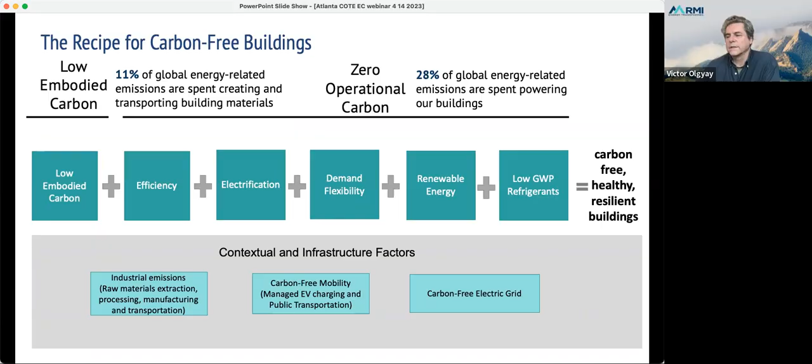At the bottom of this slide, contextual factors. We also have to think about industrial issues, transportation and mobility, as well as the grid. Those things surround our buildings and are things for us to connect to and integrate in the most benign and optimal way. So this is the way we think about it. And today, what we're really going to talk about is this piece up front, the low embodied carbon materials.

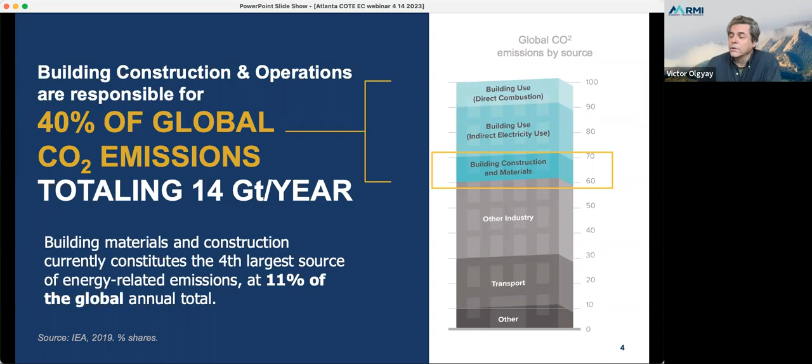As you may know, buildings have about 40% of global emissions. It's a huge piece of that. And construction materials are somewhere between 9 and 11%, depending on how you count it. But it's a big chunk of the overall buildings' impact, and one which we have a lot of control over. So what is embodied carbon? It's really the whole chain of how materials are used, from the very beginning, extraction and manufacturing of materials, to the end of life, where we have disposal and recycling.

So in this slide, all of those items in yellow are considered parts of the life cycle where we're thinking about the embodied carbon, and the blue is the operational area where we're actually using the building and expending energy to keep it warm or cool or ventilated or lit.

But moving along with this, most of the time people really focus on this upfront part, so the part on the left-hand side of the blue square, and that's really where a lot of this goes. And we don't usually have as much influence over what happens at the end of the life of the building, so we can make assumptions about that.

But it really ends up being pretty critical to think about that and to ensure that when we're designing buildings, we are taking that into account, that we should be thinking about what's going to happen in the future. So we're creating the opportunity for disposing or reusing our buildings in a manner that's going to have the best impact.

Yeah, so actually that upfront piece, the extraction and manufacturing, kind of the cradle to gate area, is really where a lot of the accounting for embodied carbon typically goes, and that's not bad. Clearly, the right-hand side is important as well, but the left-hand side is kind of the part where we can focus on today.

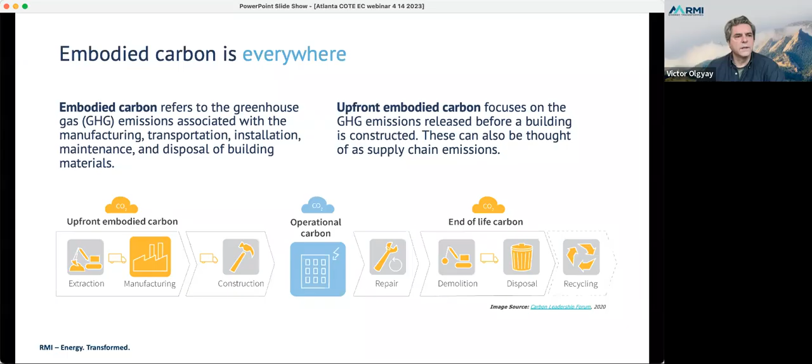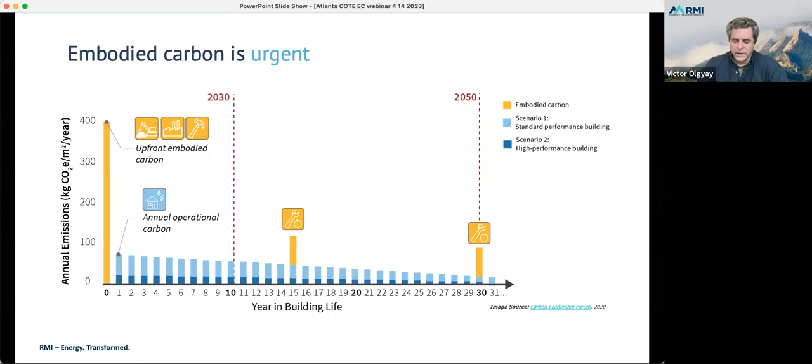The other thing about embodied carbon is it all happens right away, right? So these yellow bars here are indicating embodied carbon, the middle one being kind of repair or renovation that might happen to the building. But all of that stuff adds up, and the blue bars are indicating operational energy. But what this means is that this is a big hit of carbon to our climate right up front.

And over the course of 30 years or so, that embodied carbon will be sort of met by the operational carbon. And obviously, if it's a more efficient building, it might take a little longer, but the embodied carbon is huge. It's considered equivalent over, say, a 30-year lifetime. And it's worth thinking about, how can we start to address this?

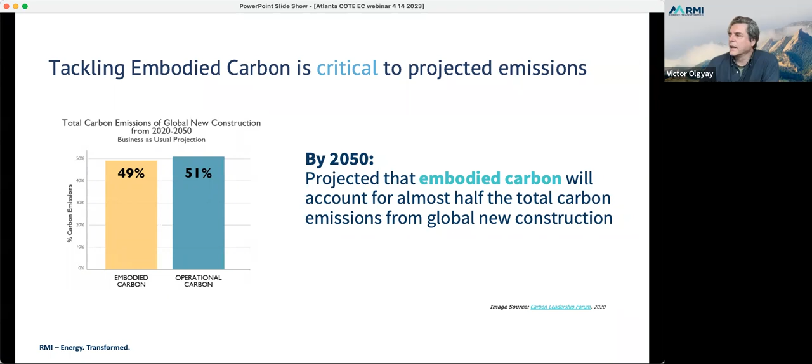So I guess maybe the good news here is that because people have not been thinking about embodied carbon too much, there's really a lot of fairly straightforward ways of addressing this that we can get on right away. So how do we do this cost effectively? Well, this was a question that we had at RMI, and a few years ago we worked with Skanska, and we produced a few reports.

There's this solutions guide for concrete, obviously being one of the big concerns, and then we looked at overall building construction and how can we start to think about reducing embodied carbon, and what makes sense, what's cost effective or at cost parity.

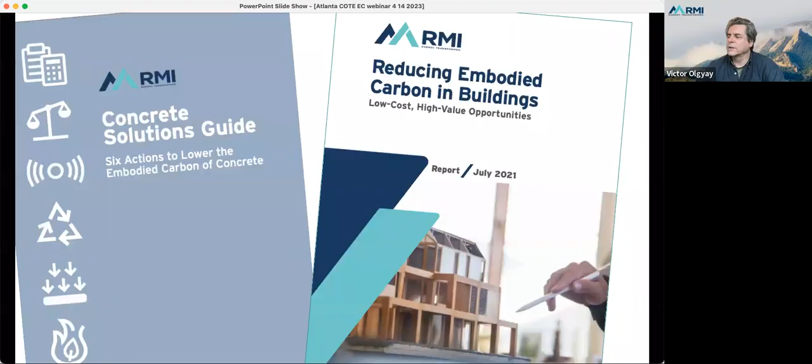So we looked at 3 different building types, and these were real buildings, actual physical buildings constructed by Skanska. And we looked through all of their different materials lists, and we took three typologies that we thought were representative of a lot of buildings out there. They're all slightly different. We've got the larger steel reinforced concrete building, a wood frame building, and a tilt-up building, which is more representative of warehouses.

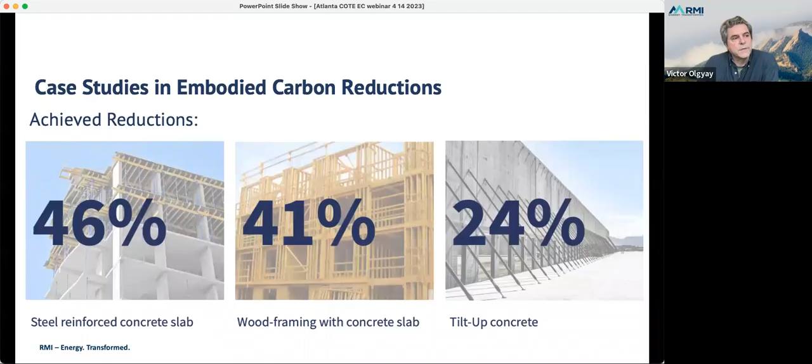And with all these building types, we were able to look at basically material substitution. So just one-for-one material substitutions, going from what was actually spec'd in the buildings that got built to something that was best of class or available for that building, but at cost parity.

So, in this case, with the mid-rise concrete and steel construction, if we found another kind of concrete that was lower embodied carbon and was essentially the same price, we just plugged that into our EC3 calculator, and we looked at all of these different areas, and we were able to come up with something in the range of a 45% reduction in carbon. And this is just, again, cradle to gate, A1 to A3.

And saving in the range of 2,000 tons of CO2e. And you can see in this case, it's a concrete building, so concrete ends up being the lion's share of the savings, but there's still quite a bit of savings in steel and glazing and other things along the way.

So it's one of those games we play where sometimes you can have a little bit of savings in a lot of materials and get to a good reduction. And sometimes it really just makes sense to focus on the big issues. So that was this first one.

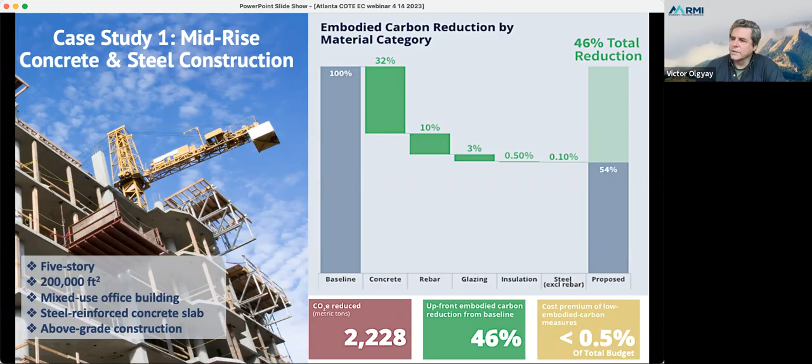Fantastic. And again, essentially no impact on the budget. Half of 1% is really in the noise, if you've ever done some costing for a building.

So this kind of made the point that we're trying to make, which is that there are a lot of significant embodied carbon reductions that are available to a typical project, essentially simply by asking and specifying them. This is not a big deal. It hasn't really been thought about that much to date, and so people haven't really focused on it.

And us as professionals in the construction industry can just say, hey, let's ask about this. Let's check the environmental product declarations, and hey, we can actually have a big impact fairly easily. Now, obviously, it varies a lot from location to location, but if you don't look, you won't find it.

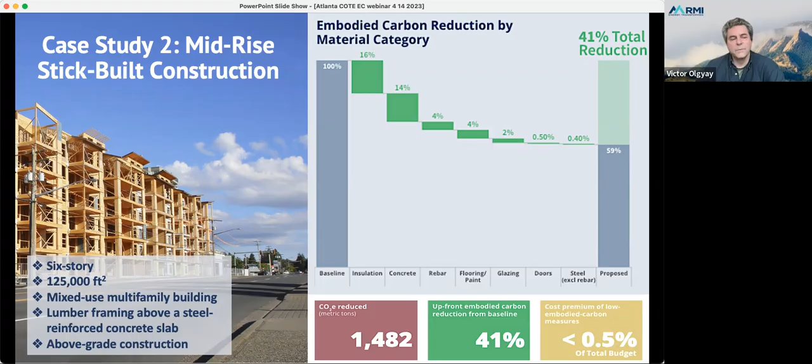So how do we think about that in terms of the measurement or the amount of embodied carbon in a building? There's two pathways here, and they're both useful for different aspects. The one way is to think about it on a material by material basis, and it's usually thought about from the environmental product declarations, or EPDs.

And then the second way to think about it is from a whole building basis, right? So this awful acronym of WBLCA, whole building life cycle assessment, which allows us to do trade-offs between different materials. So these are two different ways that have different attributes, and both actually very useful for different reasons.

But the EPDs are becoming quite standardized. I think they're becoming increasingly competent and able to be used with a fair degree of confidence and validity and comparability. So it's kind of cool that we have some good rigor on those.

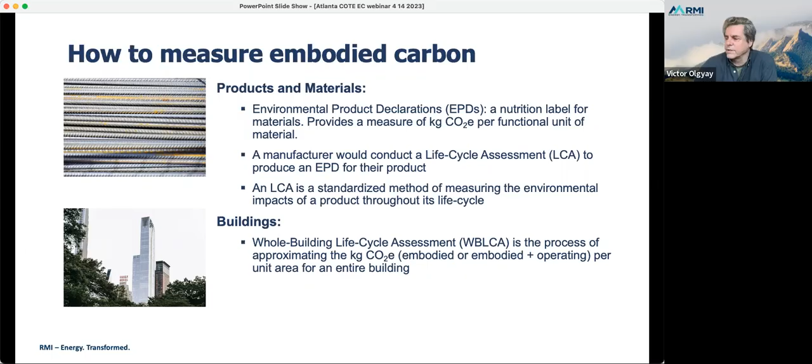With the whole building life cycle assessment, I'm going to say that it is evolving. It's still sometimes a bit more complicated. There are different baselines that people use. So the results do vary more than they do with the EPDs, which are, like I said, a little bit more carefully curated in terms of their accuracy. Okay, those are the two big ways of doing it.

EPDs in general, it's like I talked about with the little Skanska study. You can do a material by material switch out. You can basically take two kinds of flooring, two kinds of wallboard, two kinds of glazing or whatever it is, and look at them and say, okay, this one's going to have a lower environmental impact. It's pretty straightforward.

The whole building approach allows you to really switch out whole materials, right? So you can start to think about what would be the impact of steel to wood, or what have you. And that's not really something that you can do with an environmental product declaration. So this is a really significant way of thinking about this differently.

And this actually has a subtext, which is that to get really deep embodied carbon savings, you end up needing to do the whole building LCA. And that's where it's, like I said, a little bit more nascent in terms of the development of these tools and baselines and such. But in the end, when we're thinking about policy and so forth, we imagine that this is going to get a lot easier in the next few years.

And as it becomes more integrated into policy, we will see those deeper savings that are really only available by thinking about it in a holistic way rather than material by material. But right now, it's really easy to do material by material, and there's no reason why you shouldn't. It's something you can do today.

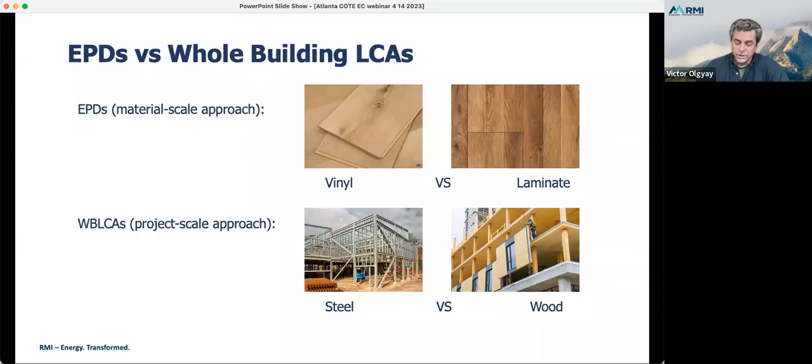So let's talk a little bit about strategies. My friend Larry Strain, I wish I had a better photograph of him, but he's a very nice guy, put together these 10 points, and this is available on the AIA website as well. He got a fair amount of traction with this little article that he wrote.

It points to some fairly obvious things. It's not the last word here, but it shows that there are fairly straightforward ideas that we can do and we should do. So reusing buildings, dealing with concrete, limiting these carbon intensive materials, using EPDs to choose lower carbon intensive materials in different areas. Think about carbon sequestration in materials, and we'll talk more about that.

Used materials, reused materials, high recycled content. Thinking about structural issues: how can we be more efficient in our use of materials through clever structural ideas, and just minimizing the amount of materials that are in there? So these are all kind of self-evident, but they do add up to significant pieces here.

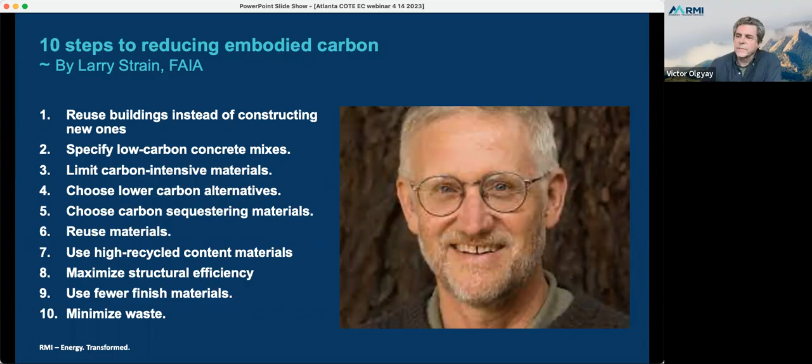And I guess as architects, designers and engineers, I'm going to say that this is something you should not be afraid of. This is actually something that is straight in your wheelhouse, right? These are not scary. This is actually your opportunity to show how clever you are and to think about design, right? Think about how this can be actually part of your palette, moving through the process of optimizing and building and being really excited about design issues. It can be just specification, but it can be so much more.

So an example of this is your local hero down there in Atlanta, the Kendeda building, a really beautiful building. I think it's a very pleasant interior, a lot of timber, and also I think the material is used quite efficiently, right? So we've got a nice combination of steel and wood to identify ways that you can strategically think about tension as opposed to compression and things like that. Overall, it's done quite effectively and efficiently.

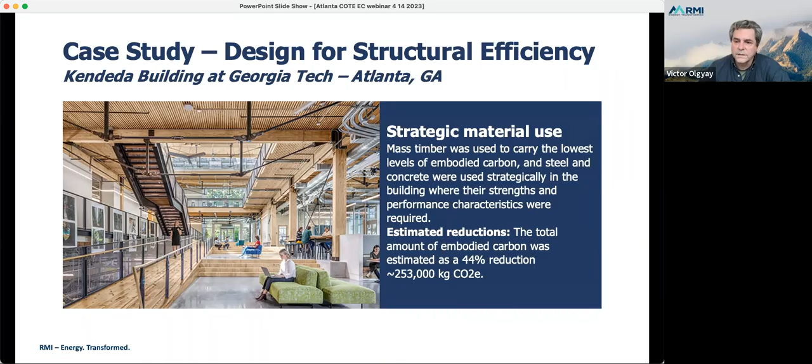And it has over 40% reduction in CO2. So that's impressive. This is a good building to be proud of. And it's beautiful. And I think in this case, you can see how low embodied carbon as a design influence assisted with the integrity of this project. So good work, LAS and company.

So thinking about this design aspect, there are things that are going to happen right up front, and then there are things that are going to happen at the end of the process. Right up front, we can start to think about this in a more holistic approach. Are there opportunities for using existing buildings? What are those larger design ideas that you can do in terms of location and concept, all of those things that can actually have the biggest impact in terms of CO2 reductions?

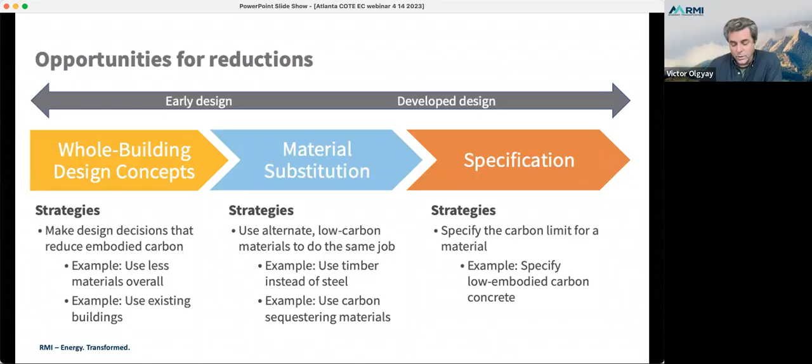And then on the other side, we have what we did actually with that Skanska project. It still got incredibly high amounts of CO2 reduction, but it was really just by substituting material for material. So there's a continuum of ability to have influence, wherever you are in the design process, to have those impacts.

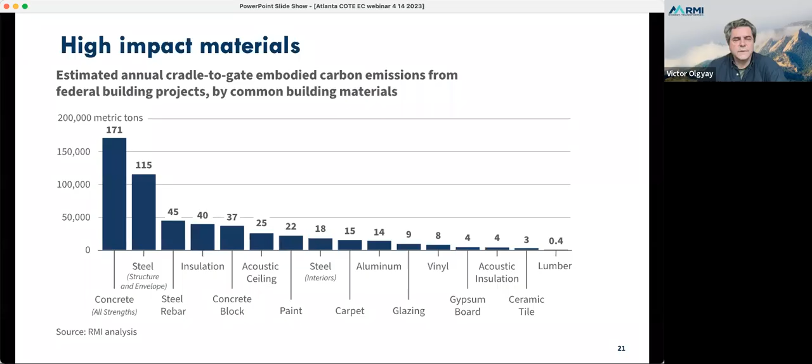So we do need to be concerned about all of these other smaller bars, but really it's that upfront material, like concrete and steel, that if you don't recognize right off the bat, you're missing a big opportunity. This is from a federal building analysis, so that's just a little caveat. Again, as always, your results may vary.

So concrete, a couple of ways that you can start to think about it. Performance specs are really good. And this is to some degree empowering your engineers about how to do this. And there is the SE 2050, Structural Engineers 2050, that are actually coming up with ways of thinking about this that are really useful for design. So thinking about it in a performance-oriented way rather than necessarily just a prescriptive one.

Thinking about SCMs. Now, these are a wide variety. People have traditionally used fly ash. That was something in LEED, but there's also slag from steel making. There are rice husks. Now, people are starting to use other pozzolans like ground glass. There are all kinds of SCMs out there. Oftentimes, they can actually improve the performance of your material. Not always, every project has different criteria, but think about SCMs.

Monitor how the project is actually going forward. Using sensors to see how concrete is setting up can make a huge difference in terms of time, money, and materials.

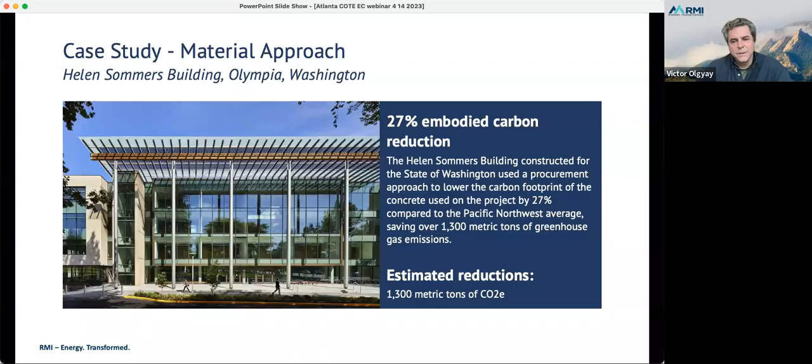Steel, obviously, another important product. There's a lot to say about this. Steel is changing a lot at this time. Sometimes it's opportunistic to basically just be using high recycled content. There's a big difference between the kinds of ways steel is manufactured. And I think we're going to see a lot more development of green steel as we're going forward here. Really, really interesting area. And I think for us right now, it's mostly about recycled content here in the US.

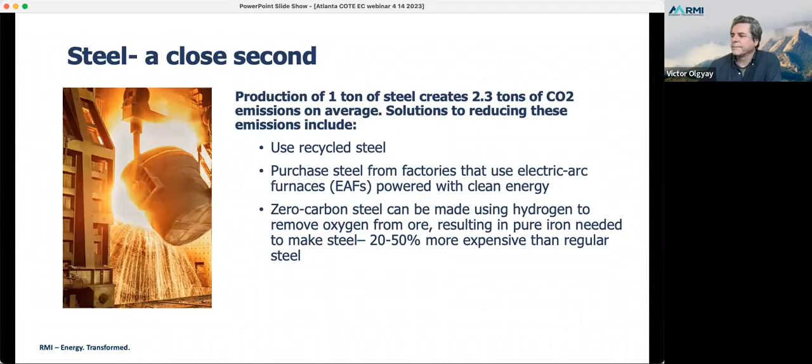Wood is kind of, some people would like to say, oh, we made a mass timber building and so we're good. And it's not quite that easy, unfortunately. While in general, wood tends to be a much lower embodied carbon product, and to some degree wood will sequester carbon. It removes a lot from the atmosphere. But it can also be pretty environmentally destructive. The idea here is you've got a growing tree that's already up there sequestering carbon, and you're going to cut it down, and that's like an improvement.

Well, the interesting part about this, and it falls into a larger description of biological materials, is time ends up being a critical component with materials. If a tree is 70 years old and it's the end of its useful life, it may have gotten to the end of its ability to sequester significant amounts of carbon. And if it has been carefully forested, using FSC or some other reasonable forestry ways of thinking about things, that can be a really great opportunity. But it's not, like I said, a shoo-in.

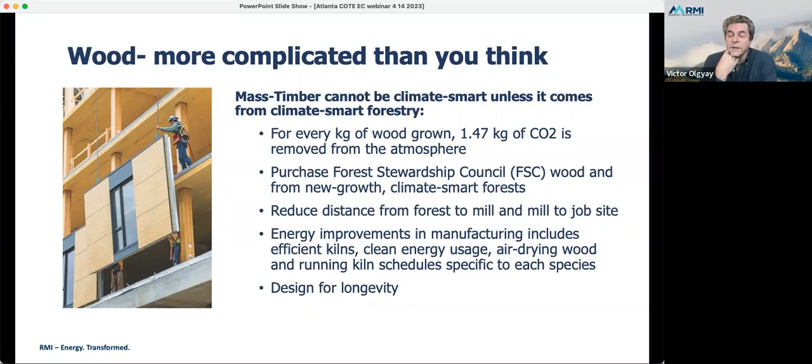You really actually have to look very closely at where things are coming from, the transportation, the care of the farmers. So, yeah, it's kind of complicated. And I think you'll see this when you start to look at this in more depth. But in general, we like wood. What's even better is more rapidly growing materials, done on a short-term basis, that can be sequestering carbon and then stored. So that's I think where we're going with a lot of the impact in terms of building sequestering carbon.

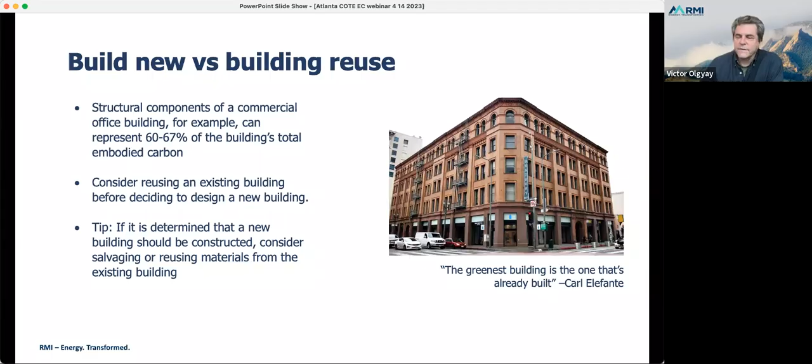Obviously, reusing buildings is a huge opportunity. We've talked about this a lot. Not always the sorts of things that people think about, but it really does make a huge difference. And there are some great examples. Edith Green is a pretty cool building, about half the amount of embodied carbon as a new building would have been. A lot of the carbon is in the structure, in the foundations, and the structural elements of the building. And so to the degree that ends up being reused, that ends up being a huge environmental savings.

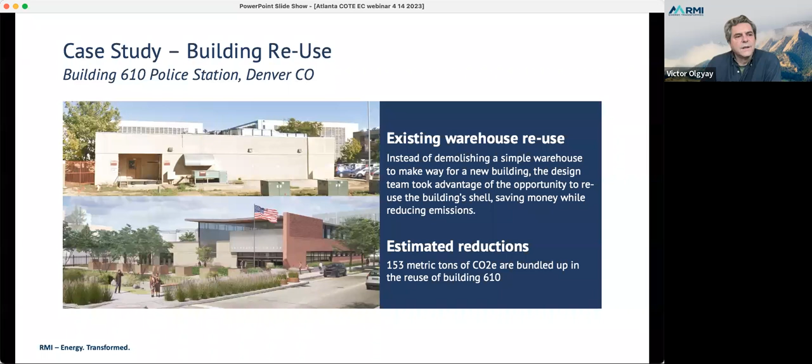There's this really cool project in Denver, where they took this windowless box of a warehouse and turned it into this really nice new building by integrating part of the old building and the new building. And again, a lot of CO2 saved in that process. So it's kind of a creative design thing about how we reuse and imagine this. And I really like the idea of embodied carbon helping us think creatively about some of these opportunities.

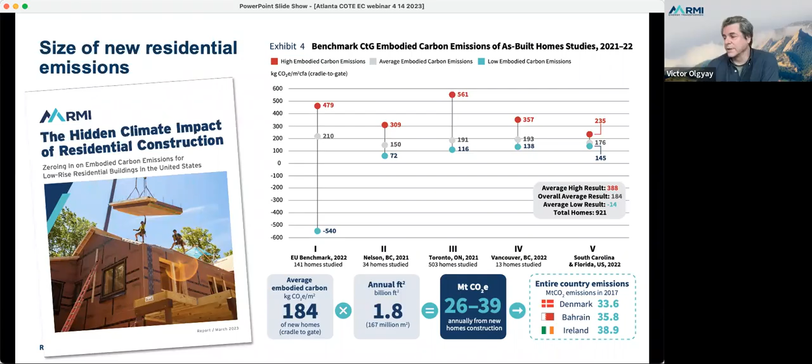And residential buildings actually are also one of the ones that are easiest to think about from a lowering their carbon impact or creating carbon sequestration within these buildings. So here's that opportunity, and we'll talk more about that. What we're talking about really is going from kind of where we are now, and I'm going to show this graph like 3 more times in different ways. So I hope you like it.

But the idea here is that we're kind of in this place where we're trying to drive down our emissions, right? And it's operational emissions, but it's also embodied carbon emissions. But if we just get to 0, we've still got all that emissions here, right? So we really need to get into this blue zone. We need to actually get into negative emissions, basically by storing carbon in buildings. There's other ways of doing it, of course, but negative emissions.

And I would have 15 years ago really been skeptical that this is actually a significant, valid, calculable part of our architectural practice, but it is. And I am convinced, and we have examples, and it can be done. And so we have this opportunity to actually become a significant part of the solution by thinking about negative emissions in buildings.

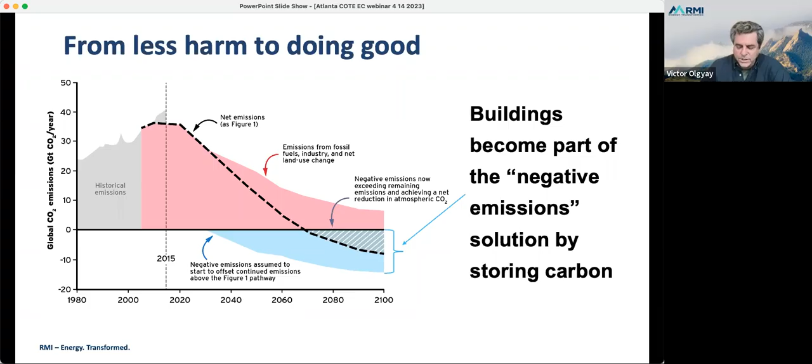So Chris kind of identifies 5 different areas of thinking about biological materials for sequestration. And we also talk a lot about carbonates and other ways of kind of crystallizing CO2 into cements and other things. And that's very durable as well. But the biological stuff is super easy and available now. So there's waste stream fibers, and this is where your different sorts of cellulose insulations and other kinds of paper, textiles, those kinds of things happen. Those are great.

Agricultural residues, we like to think of this as probably one of the biggest opportunities right now, because it would help in 2 ways. This is like the straw after you're removing the wheat, you have all of this fiber left. And typically this would actually go back into the atmosphere as it decomposes. We can take that, turn it into a building material, insulative, and store it for whatever it is, 50 years, 60 years.

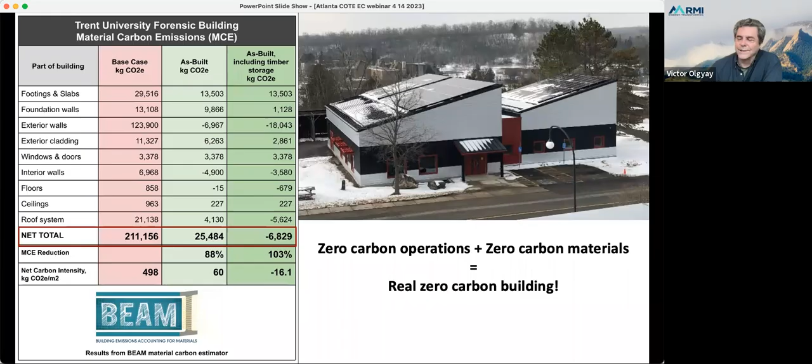So net zero operations, net zero building materials, sounds pretty good. But of course, we can't stay there, right? We have to do better. And a lot of these material substitutions are pretty straightforward. A lot of you may have seen Glavel, and then these different insulations. Wood siding is a big deal. Lower embodied carbon concrete.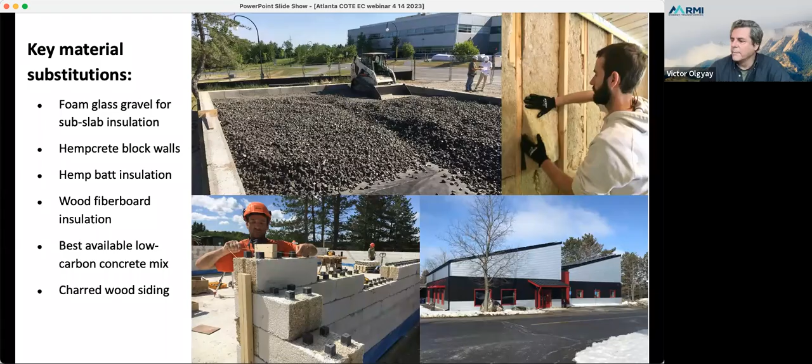So from that, we can actually start to think about what is the next step. And this is, again, a smaller house, but it produces more energy than it uses, and it actually has significantly negative carbon storage. More than that, it's actually designed to be disassembled and reassembled, and it has been disassembled and reassembled. So it's kind of taking advantage of where these seams come together, and making seams part of the design and things like that. And it's done at cost parity.

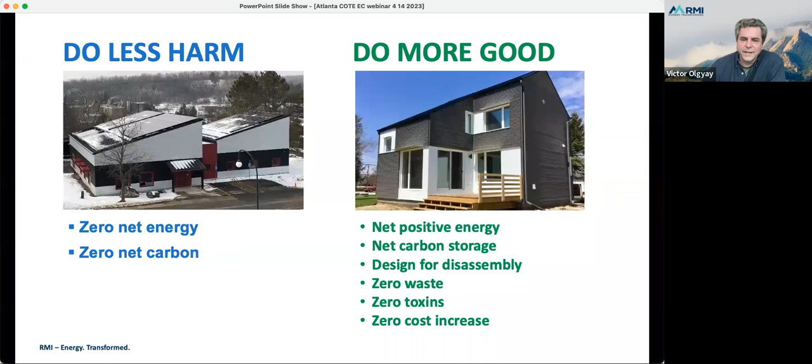So it's pretty cool that you can actually now even go further, right? These buildings are now power plants, right? They're sequestering carbon, they're producing electricity. Yeah, I don't know if this is a living building that gets up and moves, I guess. I don't know. So here's the building. Actually, you can see it's put together in these modules, and then it's actually able to be disassembled and reassembled.

And this can be done at scale. Again, 20 years ago, if you were going to tell me I could do a 60,000 square foot office building or school with straw bale, I would have been skeptical, but here we go, right? And so this is something that's not only possible, it's oftentimes very cost effective to do these sorts of things. So we can really start to get significant carbon storage when we start to integrate these biological materials at scale.

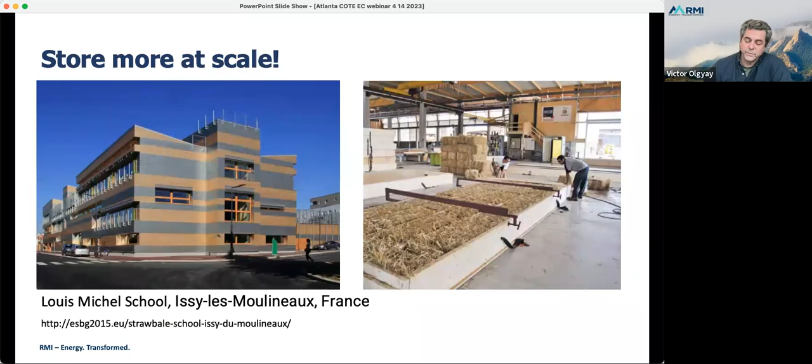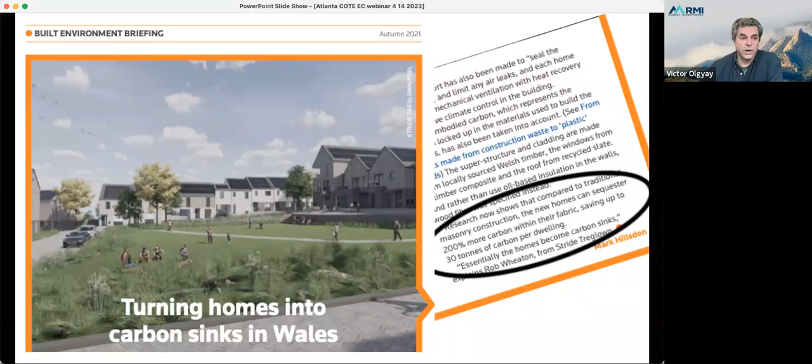It doesn't have to be the building, it could be a series of buildings, right? So here we've got a development in Wales, and they store about 30 tons of CO2 per dwelling. And I think there's about 30 dwellings here that they've done. So again, avoid the carbon intensive materials, use the carbon sequestering materials. You can actually get over that balance into a significant amount of carbon sequestration storage.

It wasn't that long ago that, to have a net zero energy building, people would be thinking it was some kind of exotic thing. And I suppose it's still not super common, but it's definitely something that people realize is possible, like an electric car. Well, we're at that point now, I think, with carbon storage in buildings.

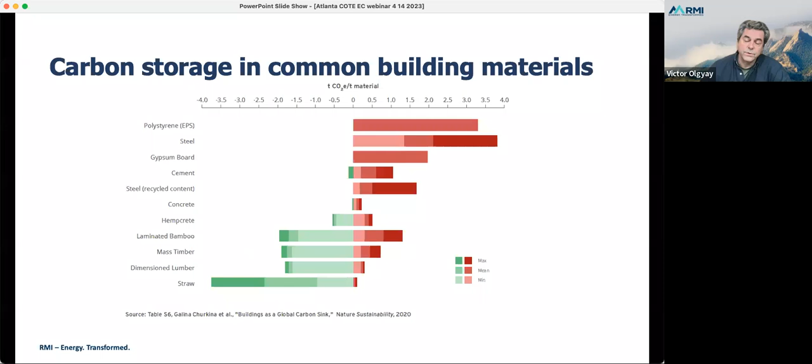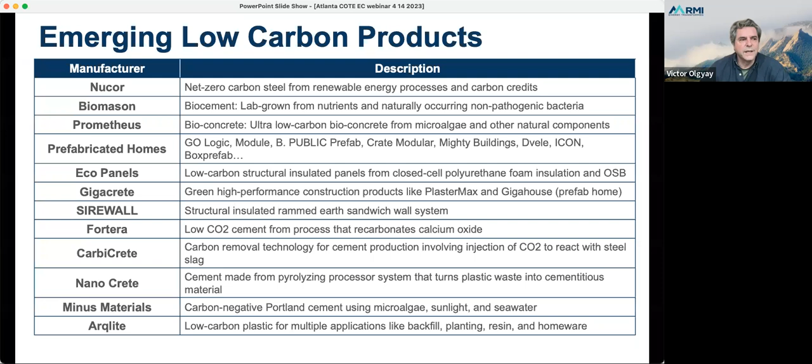There's all these interesting products coming out, panelized things, different kinds of insulation that are bio-based, just exciting, interesting, weird stuff, everything from growing your concrete to having net zero steel to carbon negative Portland cement, just all kinds of interesting things that people are doing. It's a very fast growing area. And there's carbon sequestering areas as well. So it's not just low embodied carbon, but like I said, there are ones that people are looking at for going beyond low to negative.

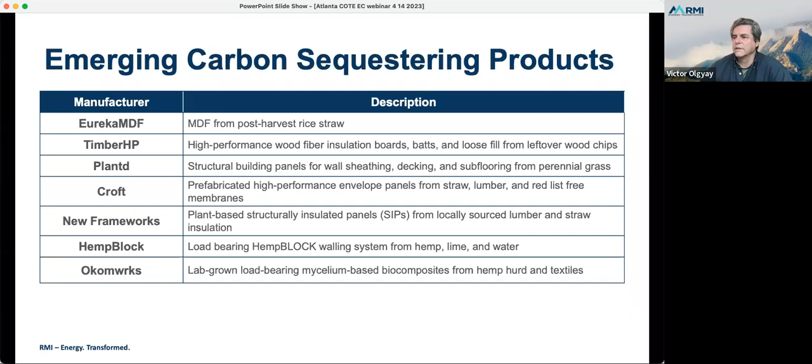So that's the way that we get from this current average of buildings, reducing them, and we're hoping to get aligned with IPCC to get to net zero and get to carbon storage as kind of a regular, normal course of events within the next 15 years or so. And it's not impossible. I mean, we got to little wooden I-beams pretty quickly. I think we can do this as well.

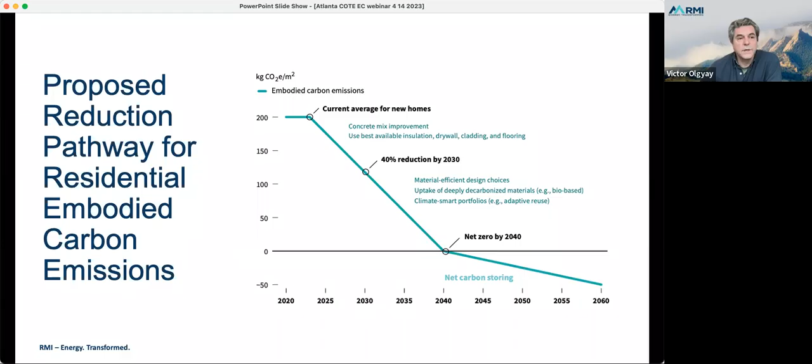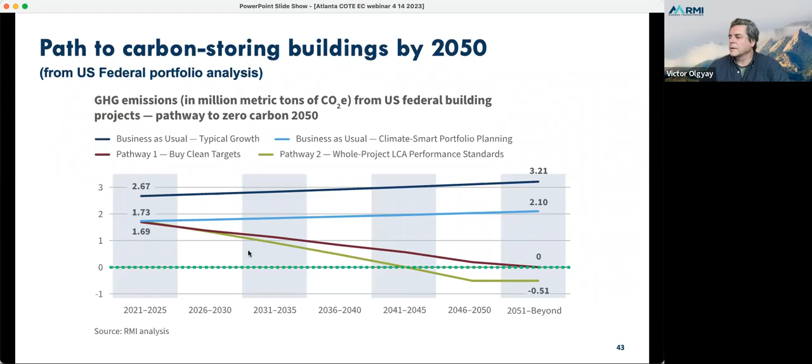So this is about us. This is about what we're doing, how we're doing it. I think I hopefully have told you that a lot of this is done either at cost parity, or it can be done with the financial implications less than a lot of the other material specifications that we put in for countertops or other sorts of wonderful things. And what we're doing really is we're making better buildings. That's the goal here, right? We want these things to support the life that we want.

Having low embodied carbon is great for recognizing the value of these buildings in terms of their ESG and climate commitments. Potentially, there could be something in carbon credit markets, and we talk about this quite a bit. And those of you who have put your toe in this, it's a little bit, let's say, evolving. It's not a clear thing that there's X amount of dollars associated with a ton of carbon, and it's clear across the board, like the US Treasury. This is something that varies a lot, but it is coming. There are some areas where carbon credits can be traded with a lot of security and legitimacy, but that shouldn't be the thing that is determining this. But I would be remiss if I didn't say that I think it's coming.

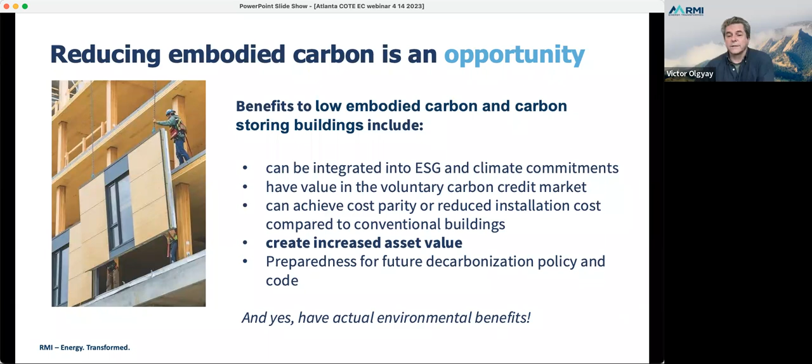There will be policies and codes that come up this way, but really the thing that is hopefully most important is that we are able to increase the value of these assets. A while ago, when you had a LEED gold building, that was required. And I think to a large degree still, people in the real estate industry look at gray or brown buildings as opposed to green buildings. There's value to having good interior air quality, to having low utility costs. Well, I think that having a low embodied carbon is also going to be perceived as an increase in the asset value. And so when you do this for a client, you are taking your architectural design knowledge and applying it to create a better product for that customer. And that's huge, right? That's what we should be doing. Oh, and yeah, there are environmental benefits too.

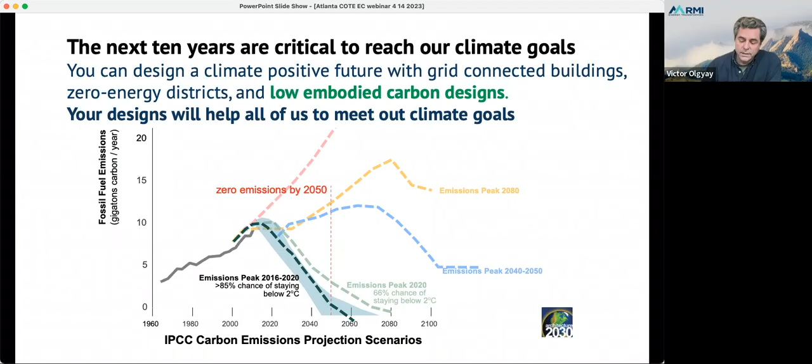Okay, so a lot of you have probably seen the Architecture 2030 graph here. You know what the issue is. We have to do this. Hopefully what I've said today is that you want to do it for a lot of different reasons. The other thing is we really need to do it, right? It's critical. It's not the only thing. We still need to think about how we interface with utilities. We have grid-connected buildings. How do we get to zero operational energy? But low embodied carbon, it's happening now. It's right up front, and it can help us do a lot to get there sooner. So that's what I have to say.

And I will also say we have a lot of tools and resources out there on RMI's website, but also a lot of our friends. New Buildings Institute is having its Getting to Zero forum in a few weeks in Minneapolis. There are the tools, EC3, BEAM, EPIC, a million other tools out there that are free that can help you. Carbon Leadership Forum has a great amount of information on their website. So you have all of this stuff in your quiver to apply to your next project.